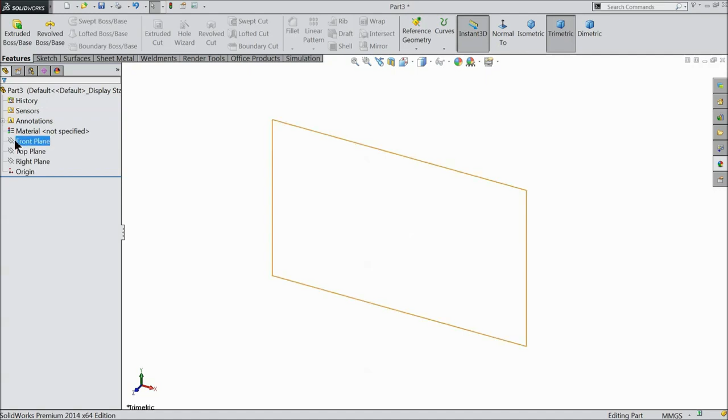Here we are going to start to make a drill chuck key. Let's start by choosing the front plane, select sketch. Now with the sketch selected, go to sketch and choose line, starting from the origin point, and go upward.

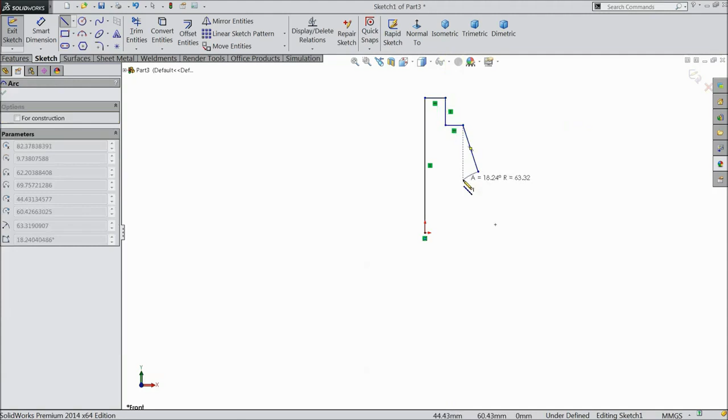Now here I want to create a curve, then come down, connect, and exit.

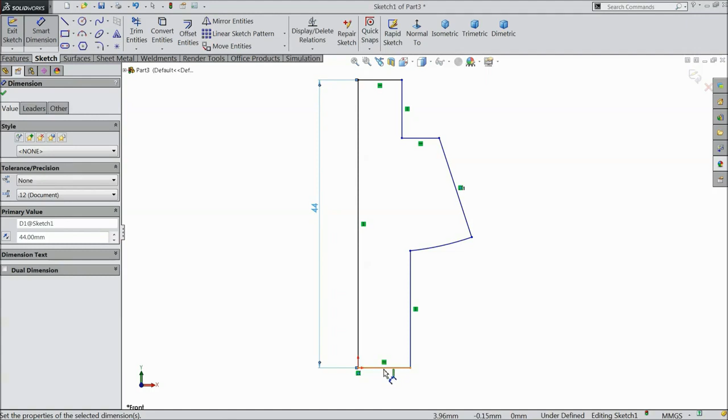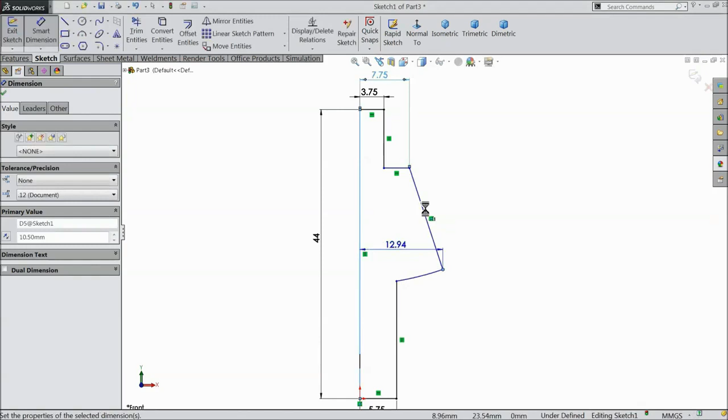Now let's define it. First let's make the overall length 44 mm, 5.75 mm, 3.75 mm, and let's define these corners, 7.75 mm, 10.5 mm, and let's make the height.

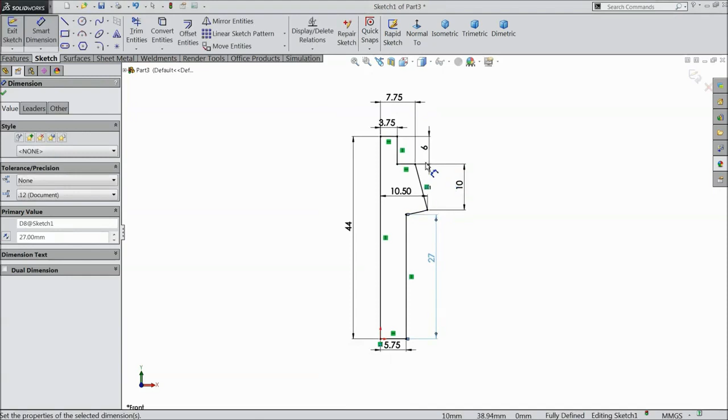Keep it 10 mm. Let's say this height 6 mm, and this one by default let's keep 27 mm, so that our geometry is fully defined. Now you can see it here, the geometry is fully defined.

Okay, select here revolve boss. This vertical line I'll keep as the axis, 360 degrees.

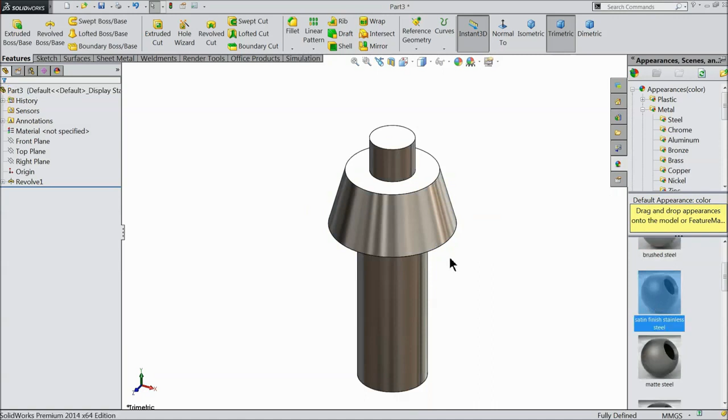I'll choose the material, satin finish stainless steel. Okay, this looks nice.

Now we want to create a hole. This is the pilot, and here we will create the gear. So let's make the hole, front plane, sketch.

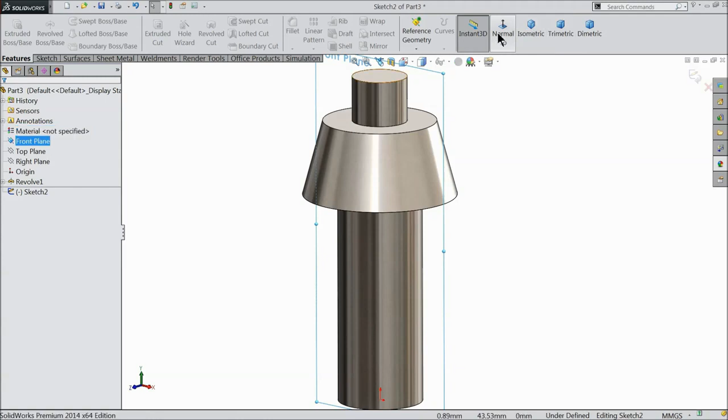Let's draw a center line, make sure it's vertical, see here. Choose circle, and at the end I'll create a circle.

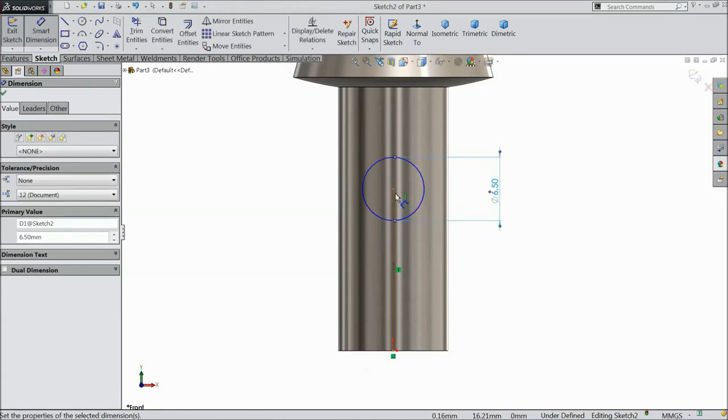Now let's define. Keep the diameter 6.5 mm, and let's say the distance from bottom 9 mm. Now here select extruded cut.

In end condition choose through all both, so that we will create a hole throughout. Okay, now see.

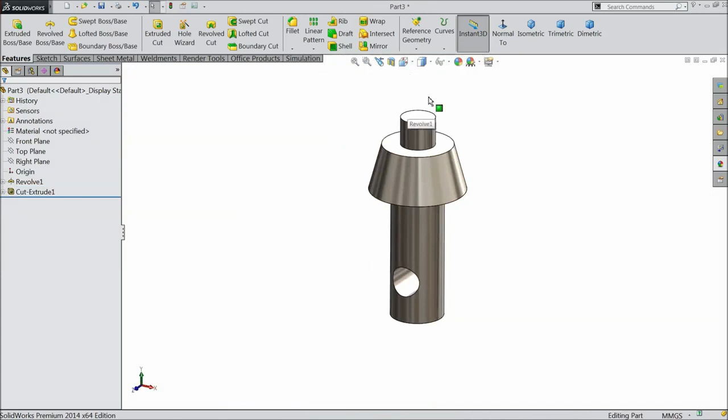Now select this face, sketch normal. Now here we will create the gear for key.

So go to sketch and select circle, and here draw one circle and another circle equivalent to the outer circle, or you can directly select this outer circle and click convert entities. Sketch.

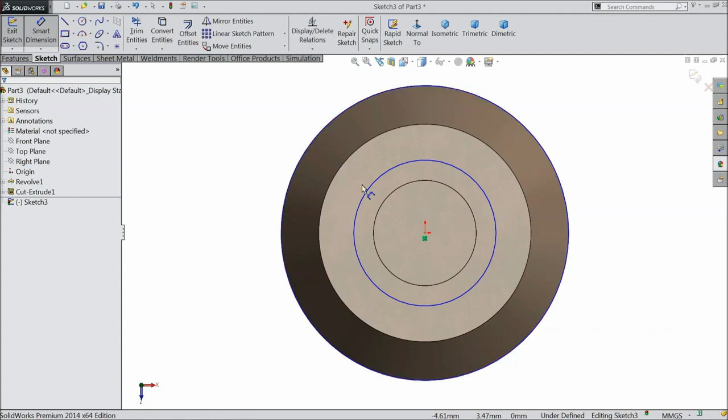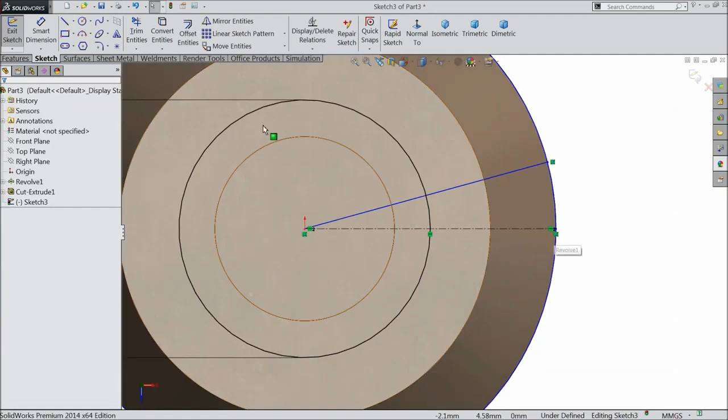10.5 mm. Choose here center line and connect with this line and line. Exit. Now let's define the angle.

Keep 10 degrees. Okay, mirror entity, and we want to mirror this line, so mirror against the center line. See here. Okay.

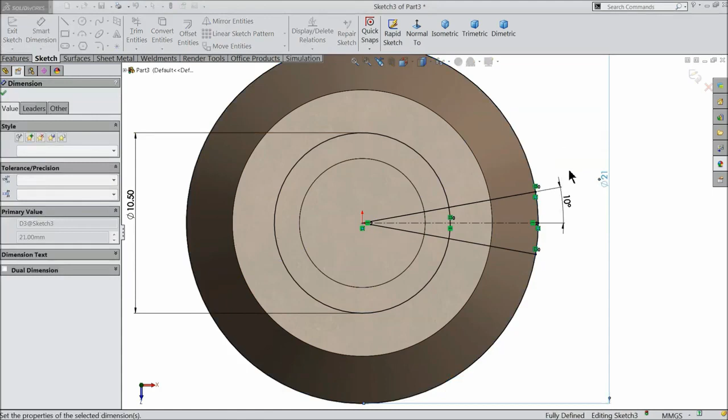Now just take outer diameter 21. Okay, choose here trim entities and trim the outside line.

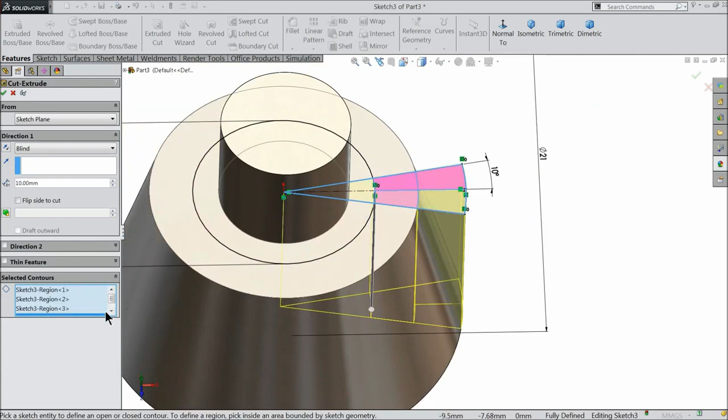Now see, this is the geometry. Select here extruded cut and select the portions 1, 2, 3, 4, not all. Just check.

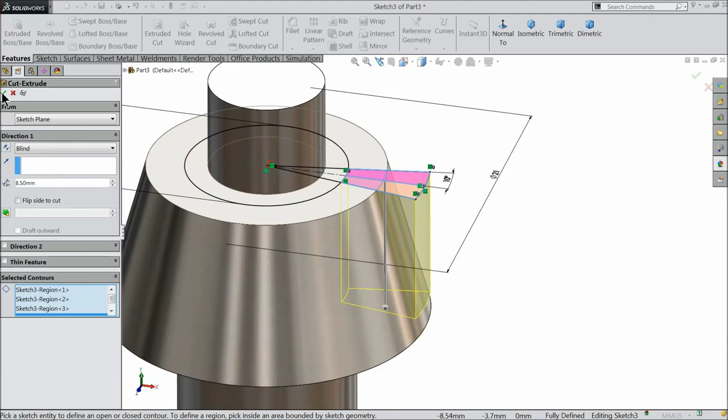Now these 4 corners we want to cut. So make the length 8.5 mm, not through all. Okay, now you can see.

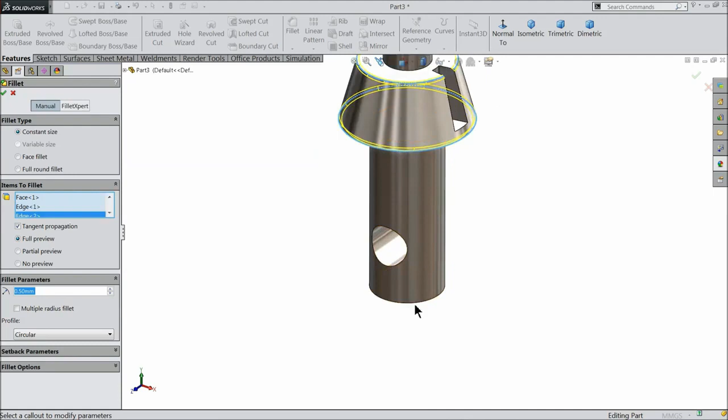Choose fillet, 0.5 mm, and select this edge and bottom edge. Okay, now again I'll choose fillet 0.25, and this time I'll select this.

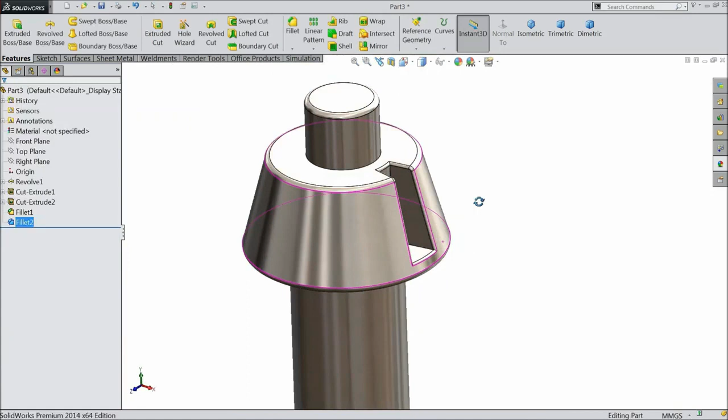Now it's time to make multiple number of gear patterns. So choose here circular pattern, select this face as a circular. We need 11 number of patterns, and here you can select cut. This cutout also we need to select, and one fillet also.

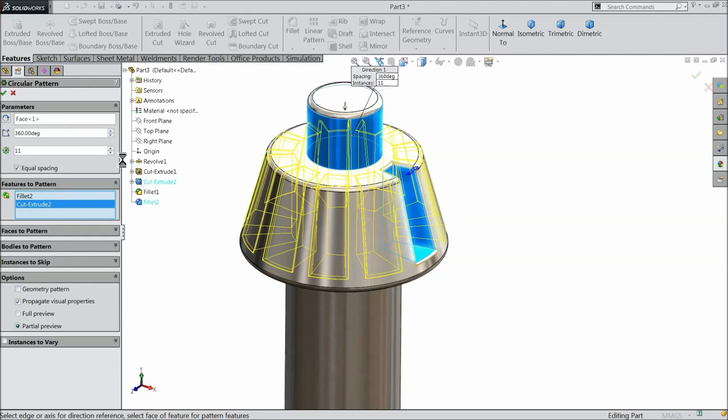Now see, the key gear is created. This is the chuck key, drill chuck key gear.

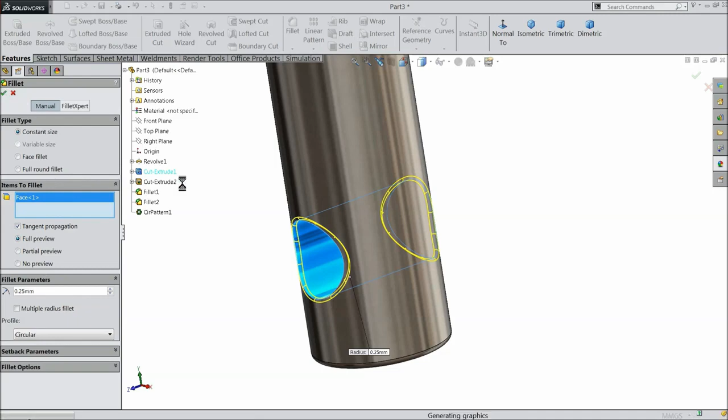Select this inside face, so both ends will be selected. Keep radius 0.25 mm. Okay, so this is our pilot, chuck key pilot with gear.

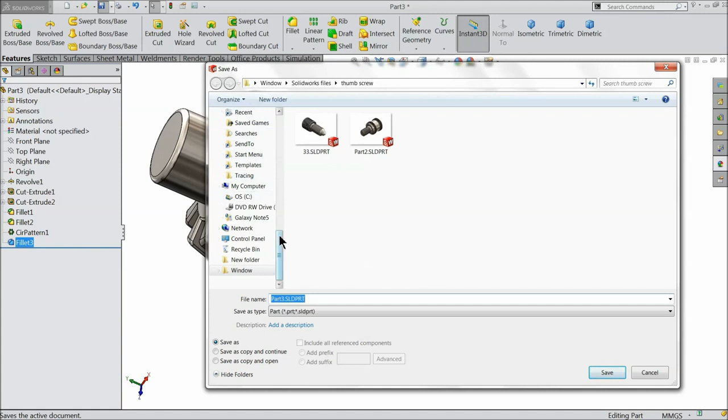So let's save it. Go to desktop and create one folder, drill chuck, and here give the first part the name pilot.

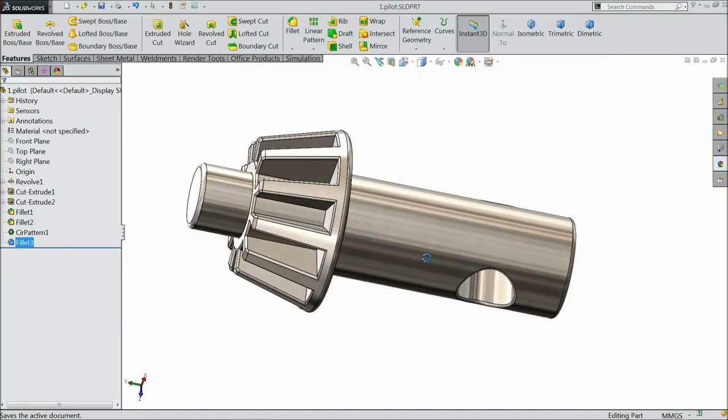For this real view, actually you need a professional graphics card, or otherwise your Solidworks should be registered with the Solidworks Corporation so that it will look real view.

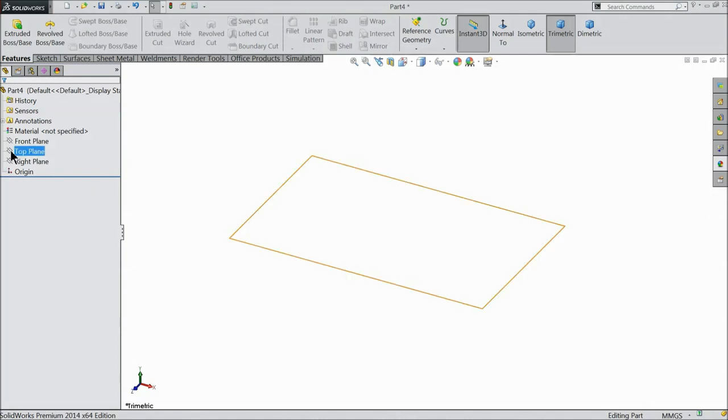Next part of the drill chuck key: the handle. So let's start. Select top plane, sketch, and here select circle and draw a 7 mm diameter circle. Keep the diameter 7 mm. Okay, and extrude it, up to 67.5 mm long. See?

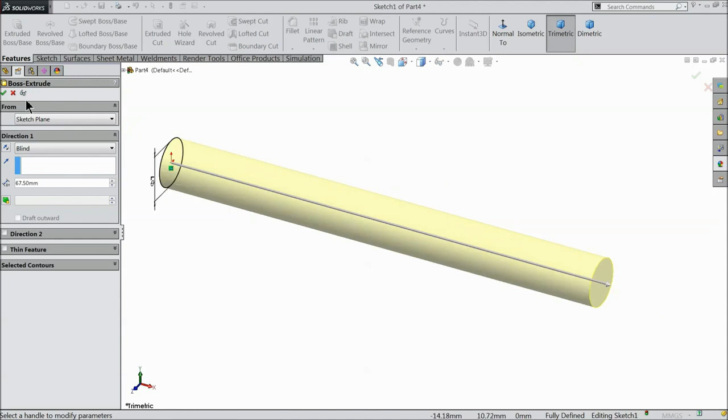Okay, we will define the full material, satin finish stainless.

Now again choose the right plane, sketch, and here select center rectangle. Select both the vertical and horizontal lines, make equal.

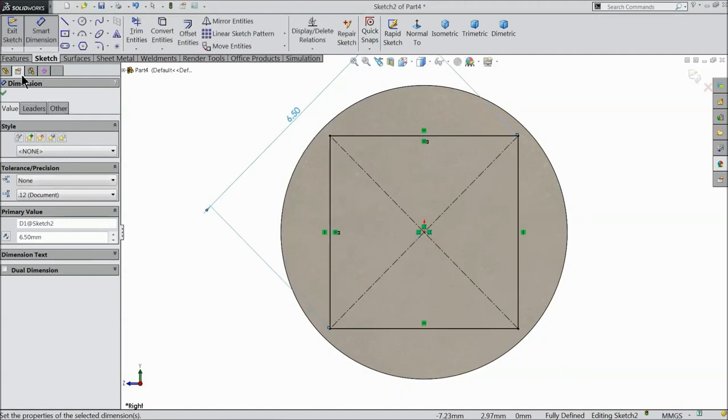Okay, now let's define. Keep the diagonal 6.5 mm. Okay, now exit. Now it's time to cut.

Extruded cut, go to selection, select, or here no need to select, you can select here flip side to cut.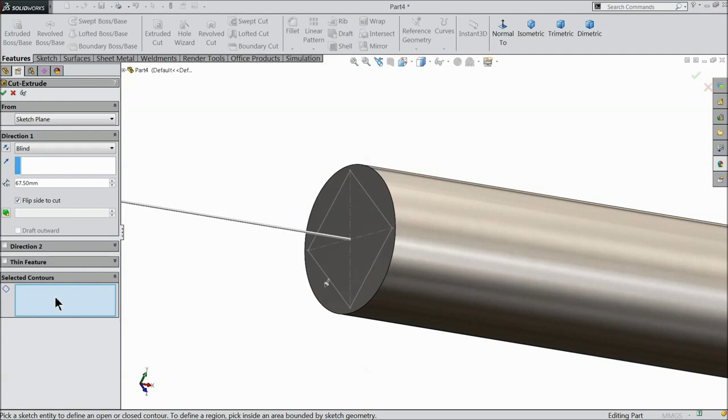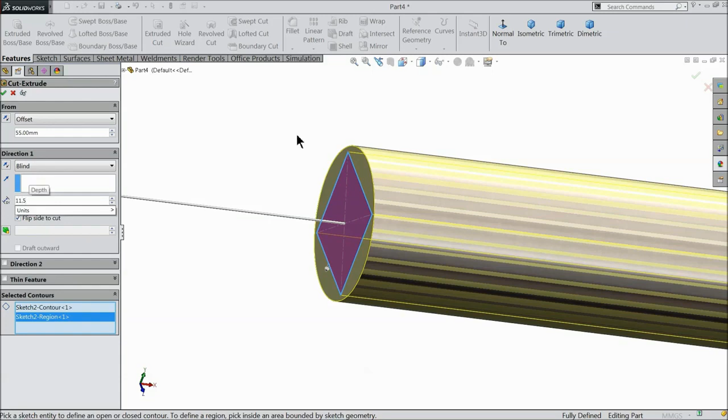Okay, and select here offset, 55 mm. Now see, we already selected here, and end condition 11.5 and mid plane. Now you can see it here.

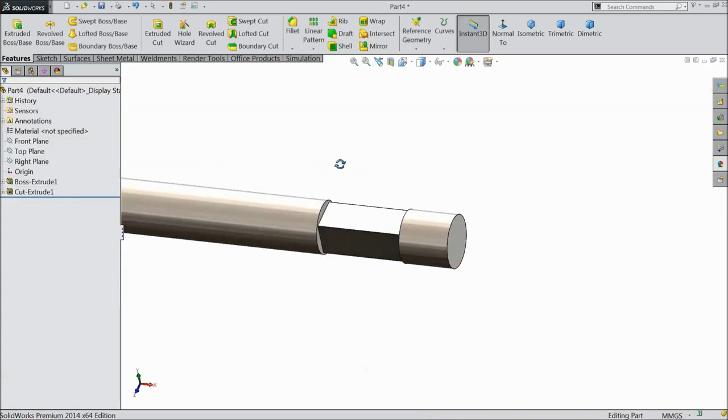Okay, that's better. Now see, we cut it here.

Now choose top plane, sketch. First draw a center line. Exit. Make sure it is horizontal.

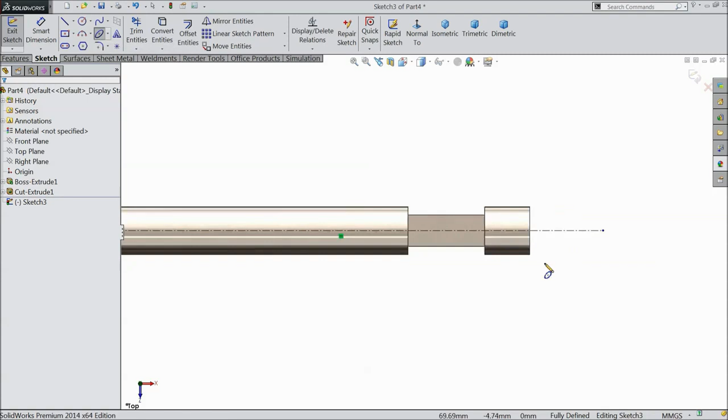Now here choose ellipse, and select any one center point. That's it. Exit. Now let's define it.

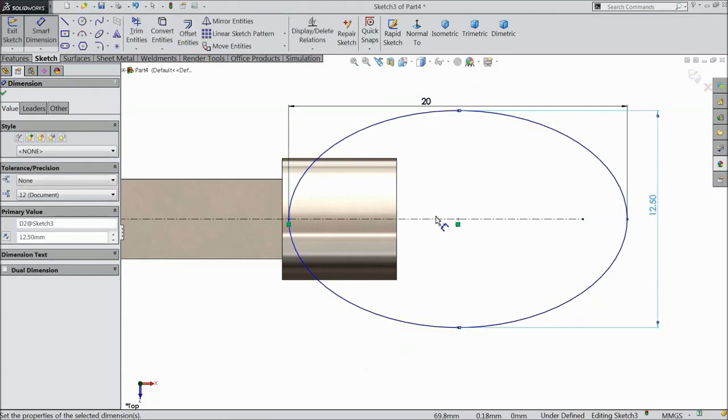Keep the overall length 20 mm and width 12.5 mm, and let's define the distance from end point, 83.5 mm.

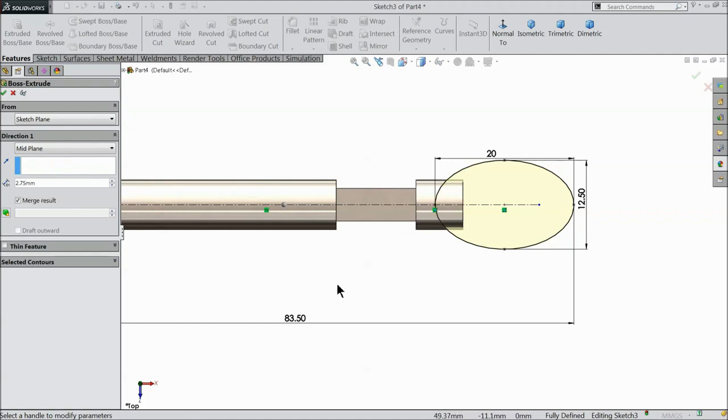Okay, and it's time to extrude. Keep end condition mid plane, and thickness we will prefer 2.75 mm.

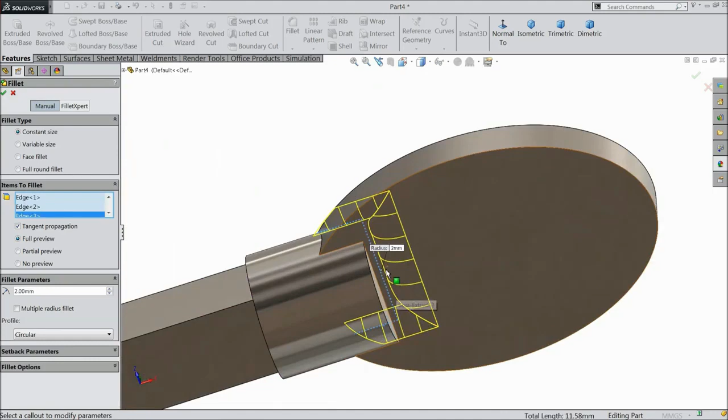Now choose fillet, keep 2 mm, and select this edge. The same we need to select, back side, or you can mirror it also. You have many options.

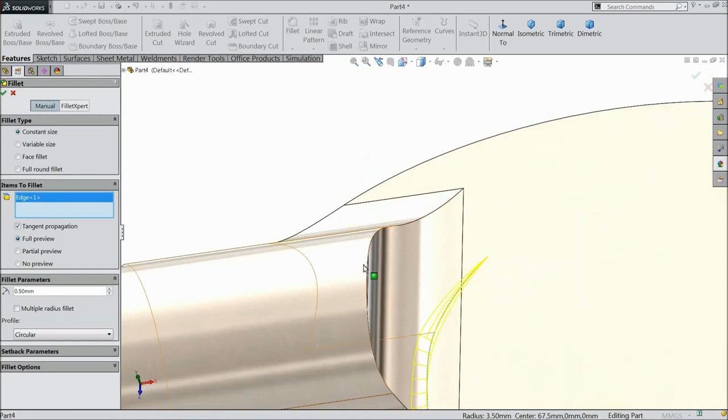Again fillet, 0.5 mm, let's select. Okay, that's it.

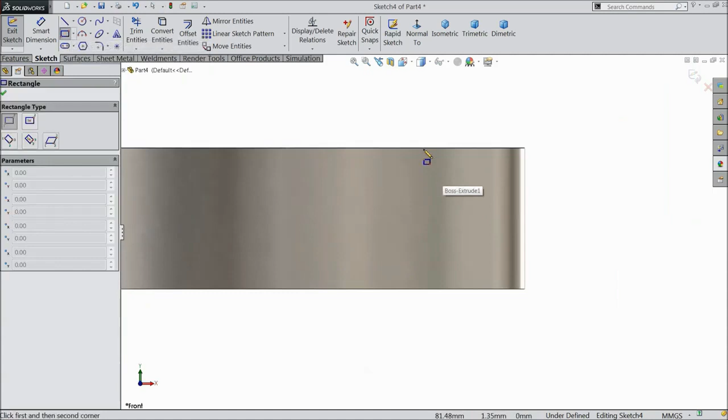Now choose front plane, sketch, and here we will create some grip. So select here center corner rectangle, draw 2 rectangles. Exit. Now let's define it.

0.5 mm, and keep the distance from the outer edge 0.5, and let's make the mid distance 2.5 mm.

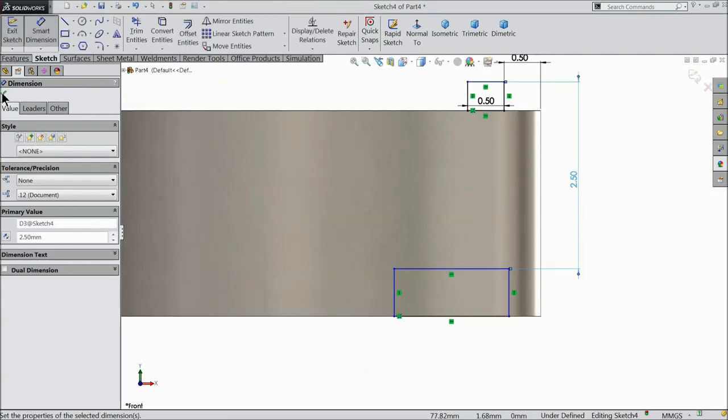Okay, now let it drag down. That's it.

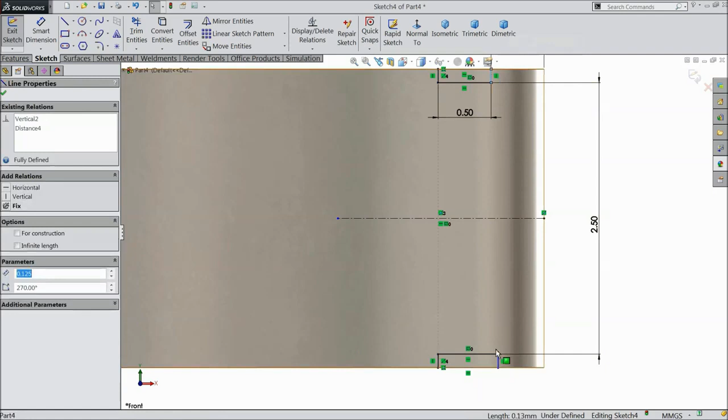Let's draw a center line. Select these 3 lines and make relation symmetric, so that this is the mid distance. Select this line and this line, make relation collinear, and here also the same collinear. Okay, now the geometry is fully defined, so select here extruded cut.

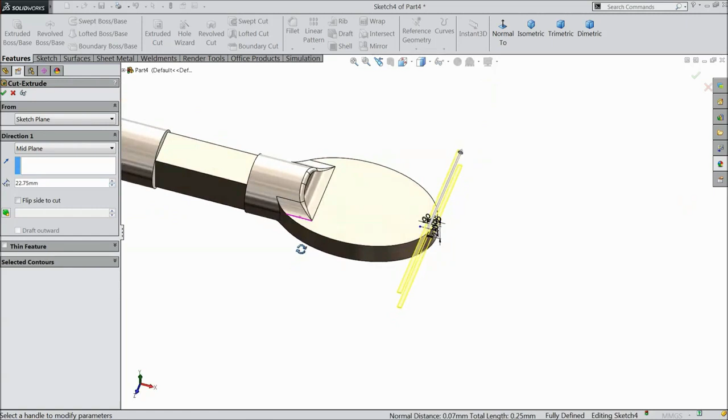Keep end condition mid plane, and that's enough. Okay.

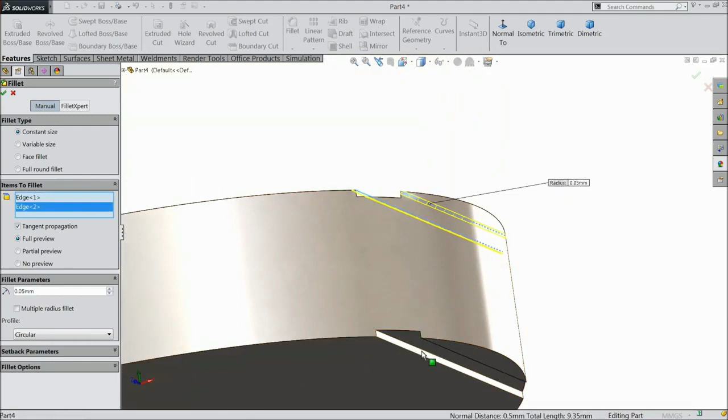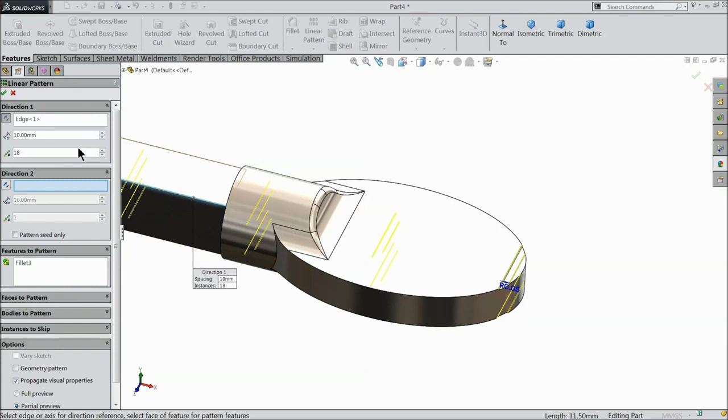Okay, now it's time to make multiple number of patterns. This is the grip. Choose here linear pattern, select this axis. We want 18 number of patterns and keep the distance 0.75 mm. See here. Okay.

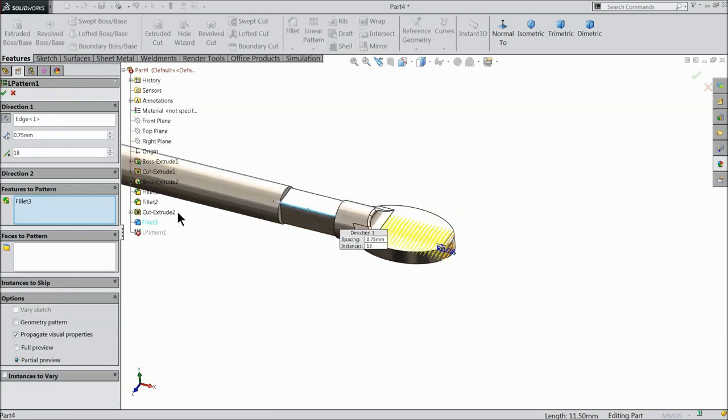Edit, something went wrong. Here select fillet as well as the previous cutout. Features to pattern. Okay.

Now you can see here, this is the grip we created on the handle, to rotate the chuck key around.

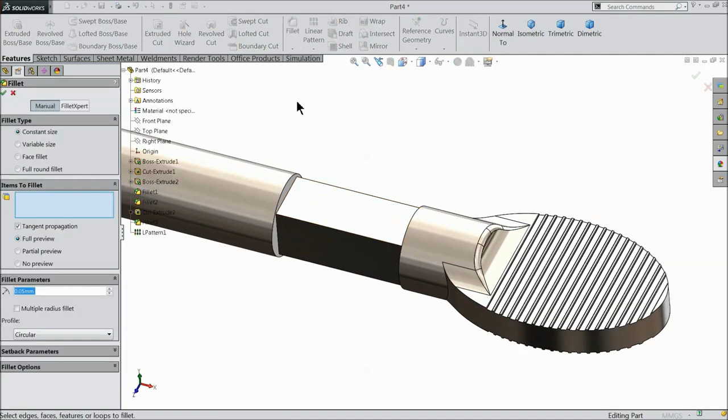Fillet, 1.5 mm, I think it's quite bigger. 0.5 mm, select both the ends. Okay, that's it.

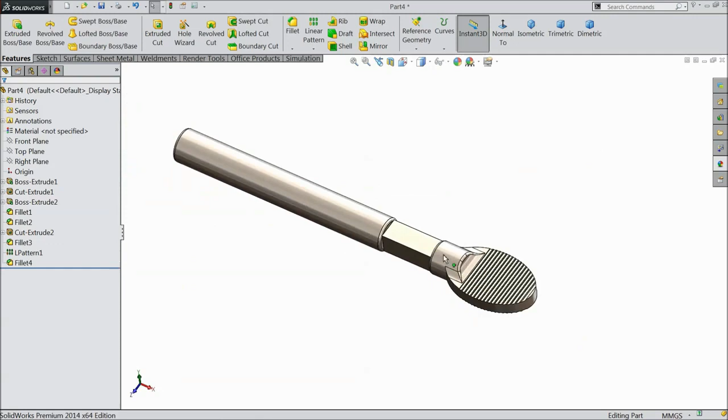So this is our handle. Drill chuck key handle is created. Let's save it, handle.

Okay, now we will assemble this chuck key. We will use the pilot and handle together. So here select assembly. And this is the window of Solidworks assembly.

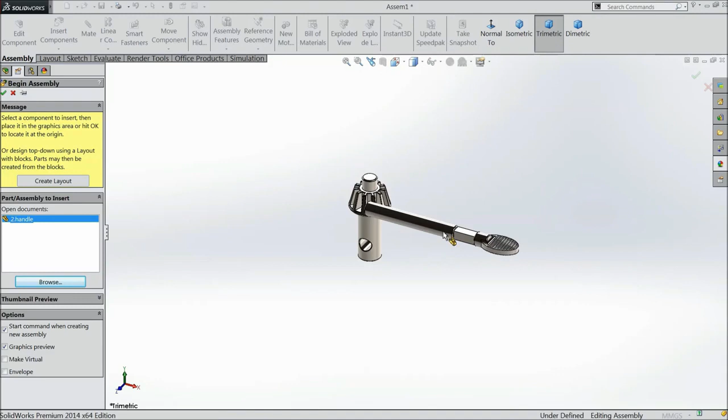Just adjust, I'll select both the parts together. Open. This is the first part and this is the second part. First part always by default.

If you right click and here see it's fixed. If you want to float, you can make it float. Otherwise, no need. Let's define the mate.

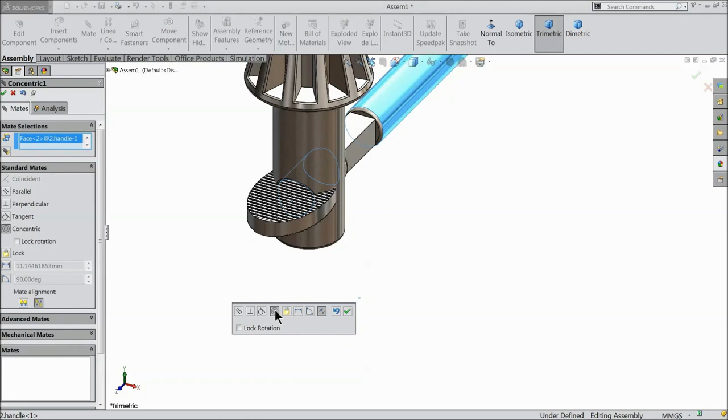Select this hole and concentric relation. Okay. Select. We want to rotate. That's it.

Select this face and this face and make here relation parallel. Okay, that's it. Now drag it.

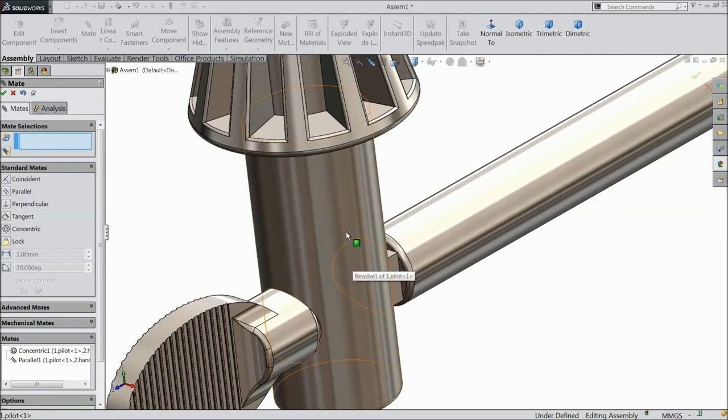Select this face and this face and make relation tangent here. Okay, so this is our drill chuck key assembly, ready. This is the widely used tool in the world for the drill machine.